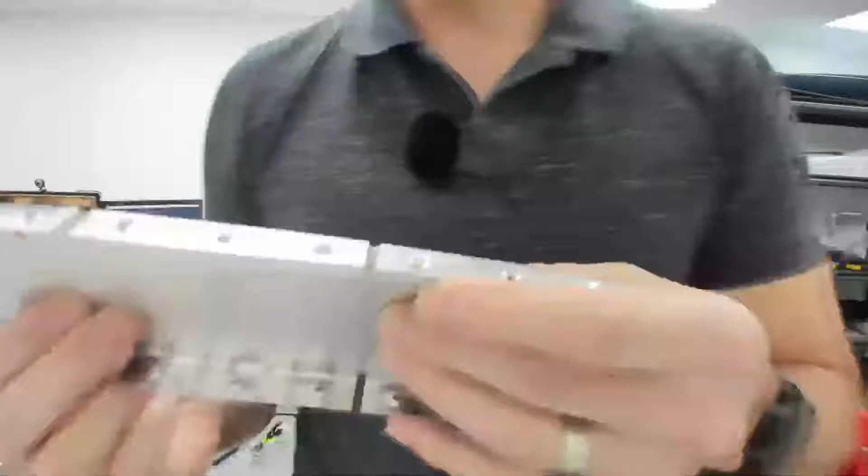Then what we did was work out, looking at our drawings, which parts we need to dimple. If I come over here, you can see we dimpled these on the last episode - there's a dent in the top of the rib there. That means the rivet head will sit on top of that and be flush on the skin, so you've got less parasite drag.

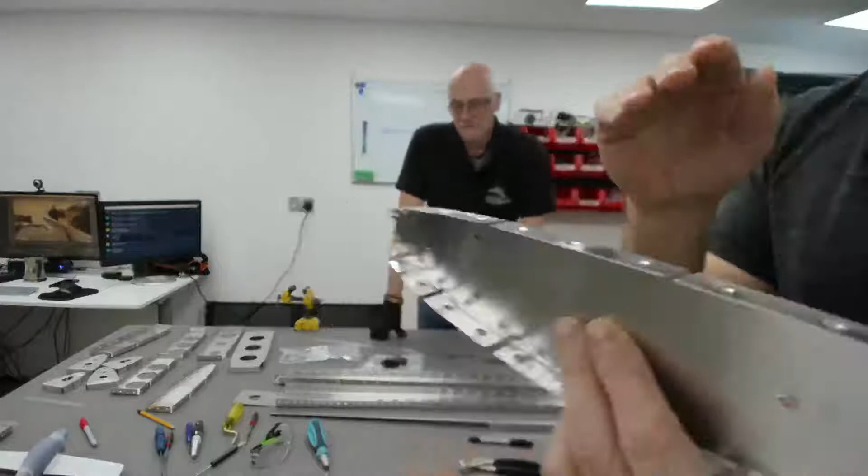Parasite drag is the drag that little bumps and things like your wing mirrors on your car produce - lots of parasite drag when driving along the motorway, lots of air getting disturbed. Any drag on an aircraft is bad because it means you need more power to overcome it, since drag pulls you back and power makes you go forward, which means you use more fuel. So getting all those rivets flush in the wings and tail of the TSI means it goes a bit quicker than the Sling 4, its predecessor, and also uses less fuel, which is good because fuel is expensive if you can get any.

I don't know about you, but the petrol queues are no longer out there anymore. No, I filled up before I came here tonight - the garages are full of petrol. The only downside is they've put the price up because obviously lots of people wanted it. 151.9 for diesel - yeah, that's not good at all. Oh dear, not good at all.

So where we're at is we've got it dimpled, and what happens is these holes need to receive - if I remember rightly, it's a 3.2 mil.

A 3.2 mil rivet goes through these holes. Because you're going to dimple it, once you put the dimple in, the hole gets a bit bigger. So what they do is undersize the holes, dimple it, and then run a drill through each and every one of these holes. There's 120 of them we've dimpled on this section, and you drill each out to the size required for a 3.2 mil rivet.

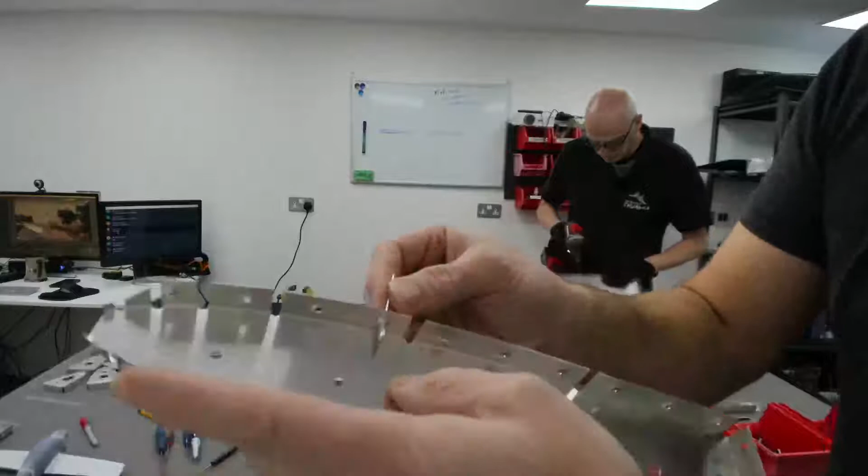We've got one there. And then we will take it and put it in there. If I come down to the camera, you'll see that this sits nicely in the dimple. You can see the mandrel, which is this long flat bit here - that'll obviously get pulled out when we squeeze the rivet, and then it'll get pushed out on the other side. So that's going to sit lovely and flush and neat in the hole for all of these.

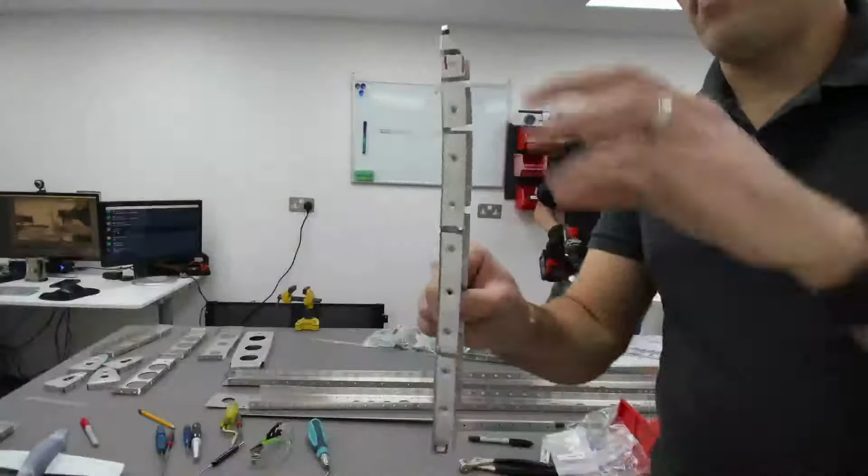So we can check through there, and that's going to look great. You can see this bit is a little bit bent, but it's aluminium, so it'll bend back, and we'll make it nice and straight when we've finished priming it and cleaning it. So that one's been done, so we'll put that there.

And we'll hang on to our special one rivet, because we want to use that. That's better, a bit quicker now. Was it on slow? Oh, it's on speed 1, so it's now on speed 2.

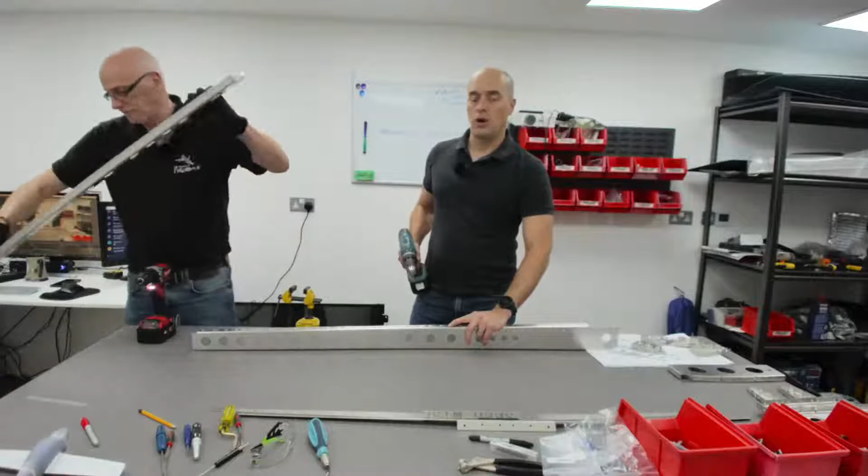And the good thing is that it's super cheap to operate an aircraft, much cheaper than hiring an aircraft. Obviously you've got the initial outlay, but the good thing is that once your aircraft is built, it's worth more than what the original kit costs, as long as you build it well. You're more than doubling your money once the aircraft is built, so it's an investment as well. That's how I sold it to management. She was quite happy with that.

I know she's not watching the stream because when I popped my head in earlier, she had some dodgy program on the TV, some period drama thing she's watching. What, like Downton Abbey or something? No, she just finished that the other night, so she's on to something new now.

There we go. Did both sides, yeah? Yep. Cool, so there we go, simple as that, that wasn't hard was it. We've got both of those done, so what is the next step? We've got them dimpled, we've got them drilled out.

First, next step's a cup of tea. Cup of tea, yeah, that's a good idea. And we're going to make some more noise now - we're going to hoover, because you want to keep your build surface clean.

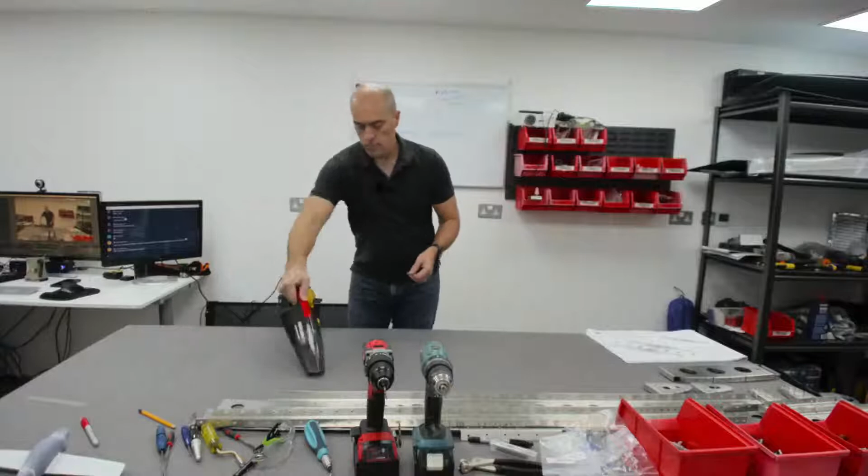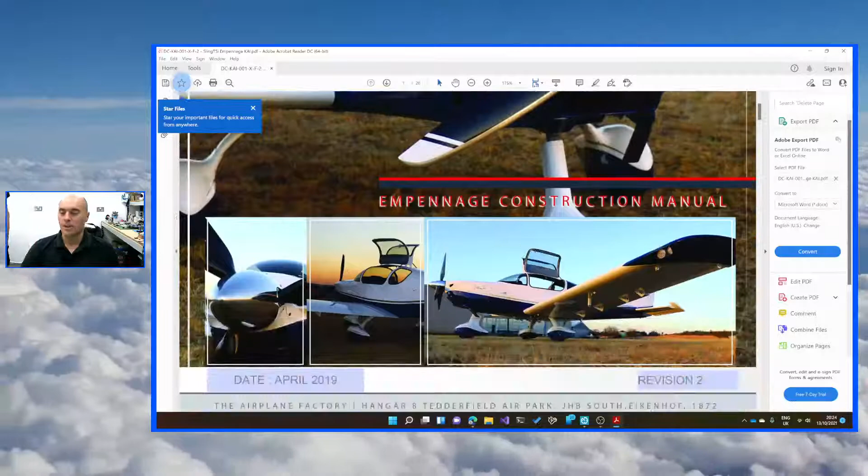Airwolf, says Lotus Dan. Yeah, now I've got the music stuck in my head. Thanks there, Dan. And how comes all those missiles and bullets and nobody's ever hit? It's still good though, isn't it. It pumps the blood, doesn't it, as soon as you hear the theme tune.

And I'm now thinking that everyone else listening is listening. Pete, I don't know what you're doing wrong mate, getting timed out all the time, but obviously you've been a naughty boy. Yeah, so here's the drawing, these are the CAD drawings that we had before, so you should be able to see those and a little picture of me either side.

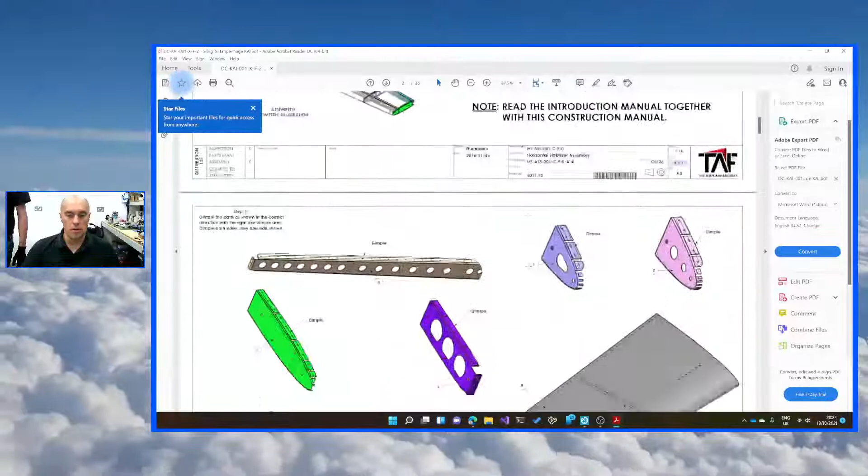So what we've done is we dimpled all these parts, and we drilled them out as well. So we've done that, and we're not going to do the skin. The reason we're not going to do the skin is because the skin's up in a safe place up there.

They can't see and... they can see me, can they? Yeah, look, I thought they were looking at... it's that little camera, okay, there, look, see, fine, it's that one up there. See, there you go.

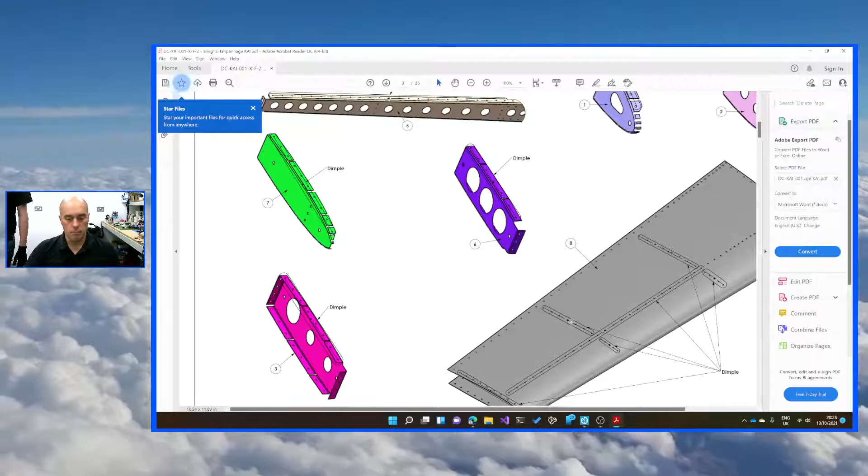And these parts here, what have I done there? No. These dimples here are on the skin, and we'll do that when we get the skin later.

What we're going to do is build the frame of the horizontal stabiliser. Then we'll call our inspector, Mark, and get him to come over and inspect the frame and make sure he's happy with the work and the quality of work we're doing, because he's not seen the build skills yet. So he signs off and gives us a little stamp in a build manual, which is up there on the shelf. And then what we'll do is we'll wrap the skin.

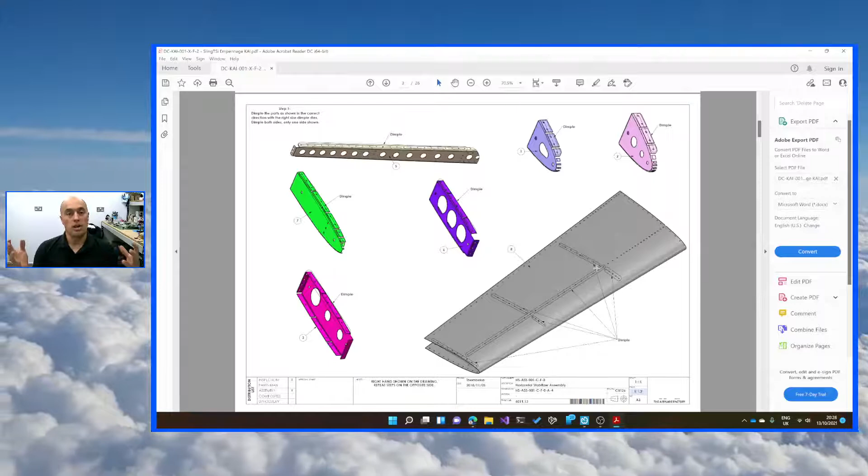The idea is that if you wrap the skin first, he can't see what you've built because you can't see inside metal. So you let them see the frame and then wrap it with skin afterwards. We've done that. We'll do the dimpling later, we can worry about that later. Then this is talking about the fitting together.

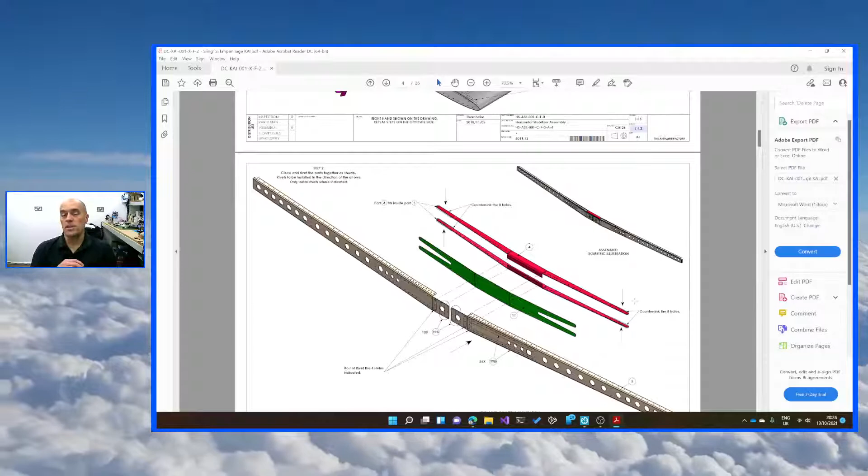What does it cost for the inspection visits? They're volunteers working for the Light Aircraft Association, so they volunteer their time. Some inspectors have a set fee, some do it for tea and biscuits, some for tea and biscuits and petrol money. So each is different - whoever your inspector is, you need to have that conversation up front and make sure you're happy with the costs they're going to charge you.

Even the ones that charge the most - and it is very good - tend to charge like £30-40 for an inspection, the most I've heard of. You probably need about 20 or 30 inspections throughout the build, depending on how comfortable they are with your skills and how comfortable you are with your own build. If you're a bit nervous you want more help at the beginning, more of them coming to inspect. If you feel gung-ho and off you go, your inspector might say, before you get to that bit, I want to see it again. Once you get that repertoire between the two of you, they'll hopefully give you a bit of free rein to hopefully not hang yourself.

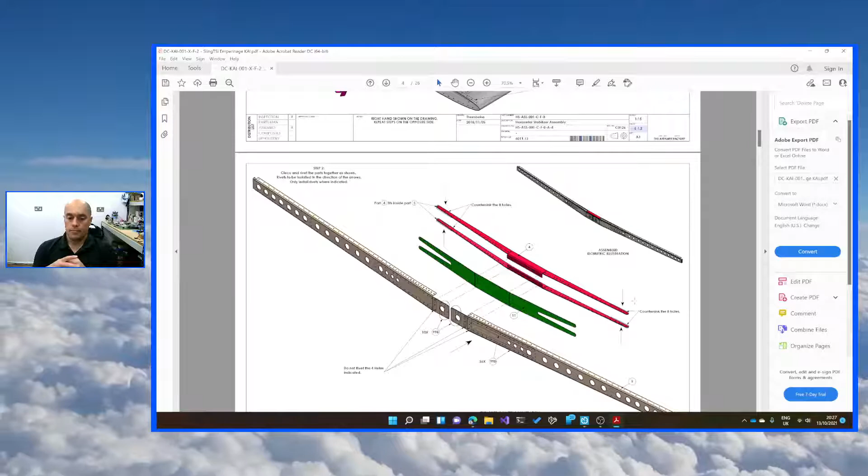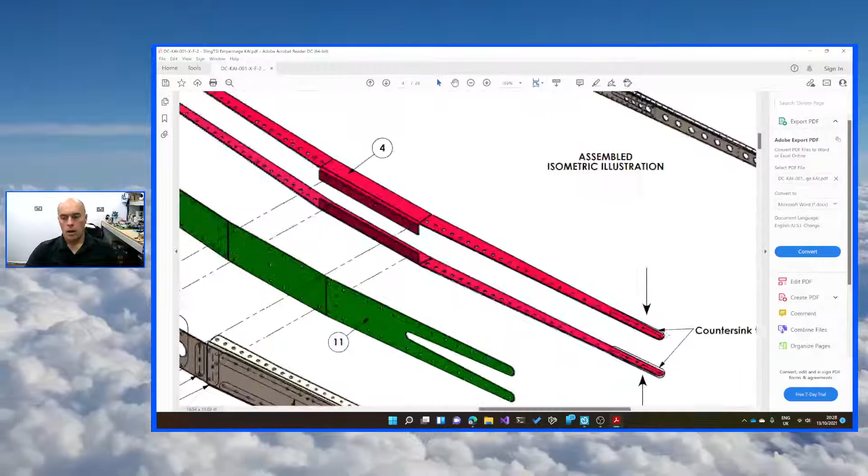It's a very important part of the process, and their expertise is invaluable because once it's wrapped in the skins, you're not going to be able to readily see fracture points or stress points. They're going to be looking at how the riveting is being done, how the deburring is being done, whether the bits of aluminium actually fit together sensibly, and whether they've got any swarf caught between them. Over the lifetime of the airframe it's going to flex for various reasons, and if you have some burring in there, or you've caught part of a rivet, that will grind in and create a fracture point which will fail at some point.

So this process is very important. While we're newbies at really doing this, they're there to say, right, yeah, this is good, this will get through - it will get primed, and then it can be put in with the skin. Then it gets inspected again after it's been primed.

So, Dan's asking about the UK reg. If you Google Golf Oscar Tango Sierra India, that's Tim's aircraft - he's the UK agent for Sling Aircraft. His one is built and flying, doing its test schedule at the moment, nearly finished. Last I spoke to Tim was about a week ago, we were texting while I was ill, and he hopefully should have it signed off in the next few weeks to a month. With the COVID stuff, the LAA engineers are a bit behind on signing off aircraft.

Pete's saying, search for Twitch how to manage harassment in chat, then go to set a non-moderator chat delay under chat. You'll have to send that to me on Twitter - I don't think it's a good time to be doing it now, we'll do that next time, because I don't want to be showing off. I think you'd end up seeing all my Twitchy stuff, which probably isn't a good idea to stream. But if you think otherwise, let me know and we could do it now as a learning thing.

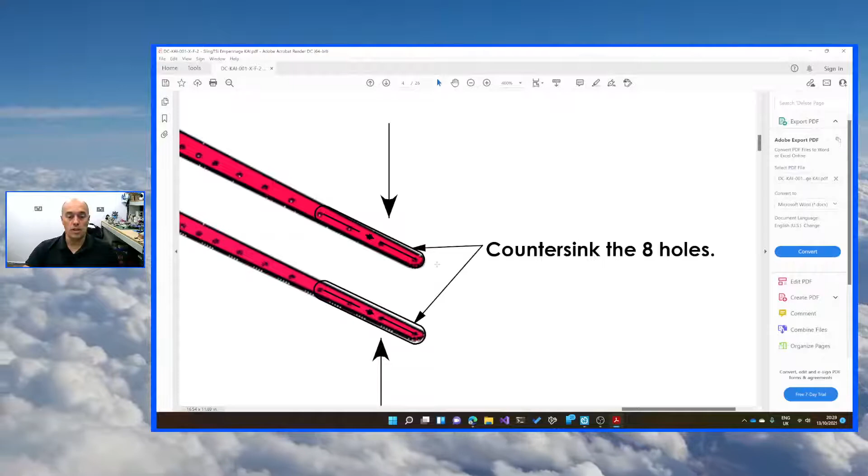So next, we need to countersink these 8 holes, and the reason is because they go inside this rib here, or inside the spar here, and they sit where some of these holes we've just drilled out, as you spotted earlier.

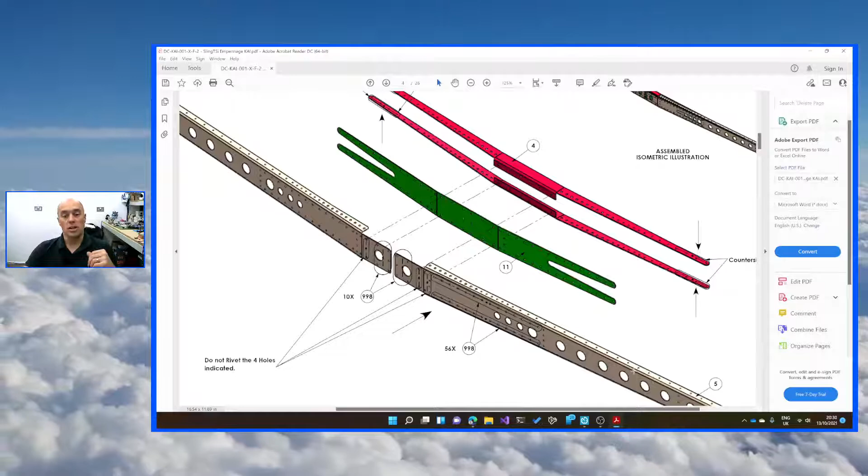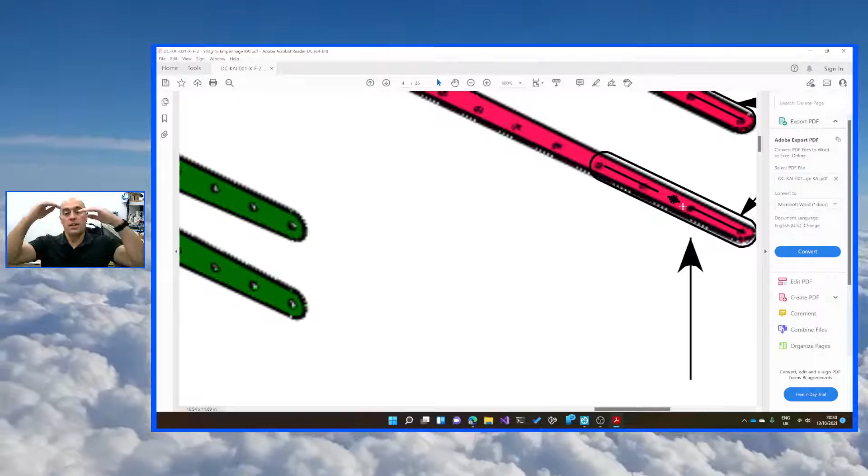We need to countersink those holes. Now, when they prep those holes, they drill them the same size as the holes drilled here, because they're match drilled, so they're undersized. Remember these holes down here, we countersunk, and then we drilled them out to 3.3. So when they started off, they were like 2.8 or something. So with these holes here, we need to drill them out to 3.3 so the rivet pops through, and then we need to countersink the tops of them so that the countersink of that spar sits inside, because this is quite a thick material.

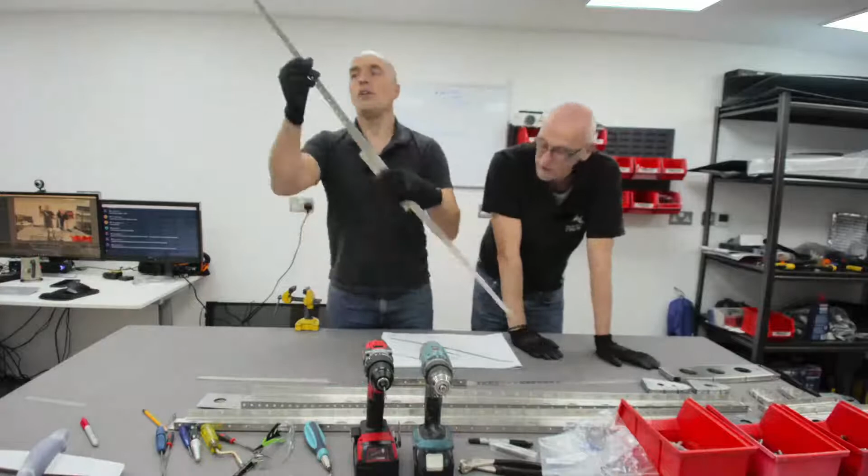First thing I want to do is make sure we're going to drill the right ones, and they should be good because we marked them before. Obviously that hole is bigger than that hole, and they're the 4 that it says. The reason we're doing it is because when it fits inside this part and goes inside like that, you can see these 4 holes line up with those 4 dimple parts, and obviously it's not going to fit, and you'll see the fact that it doesn't fit. So we need to countersink those parts, but first we need to drill them out to 3.3. We'll use our trusty vise to hold the part, because you don't really want to drill through a thick part by hand that way round.

That's about square. I don't want to do it by hand while holding it, because it's just going to flex and go everywhere. So we'll just clamp it in the vise.

Like that. So on the Christmas list, have we got a pillar drill? You know what, it is on my wish list, Chris. You know, a good friend would buy one, wouldn't they? I'm just pointing out, or if some rich person comes and sponsors the channel, you never know, we could buy it anyway.

So we've got that, we've got our 3.3mm drill, and we're literally just going to line it up and go through there. And what I'm going to do is move it along a bit so it doesn't bend too much.

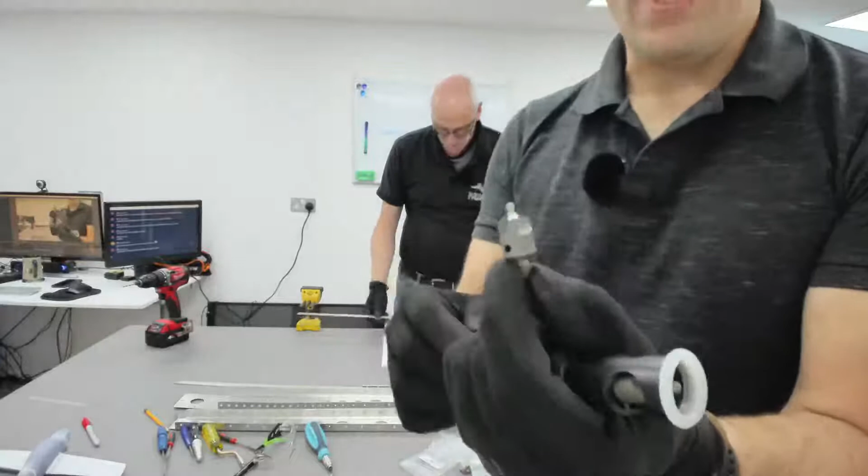So what you do is you have one of these. Now this is a cool little tool - it's a microstop countersink drill. In there is the countersink, and it looks like one of these. These come from an American company called Brown Aviation Tools. You can see it's countersink, and it's got a peg there, it's sized correctly. So this is the number 21, and the one we need is the number 30. It's American, so they have an odd numbering system, but it's the right size we need.

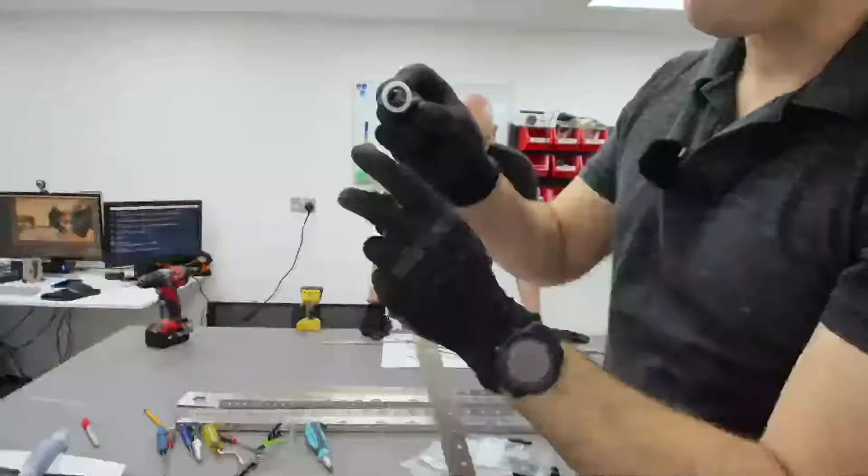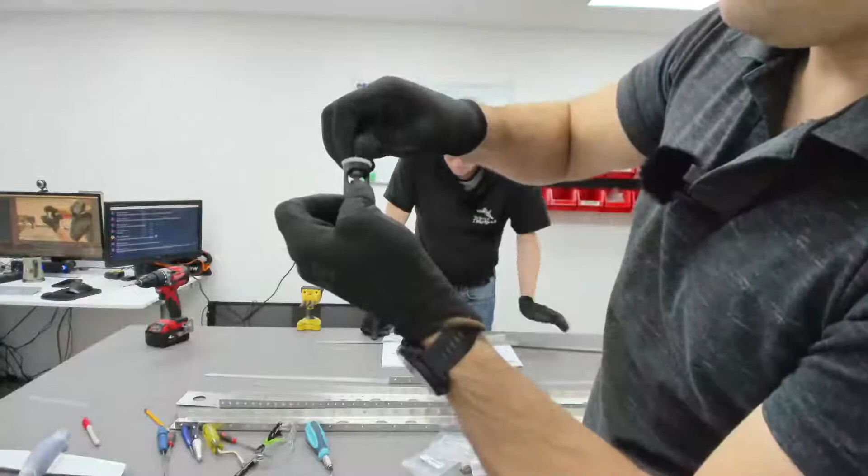Yep, it's that size, so we need to countersink this part here. Actually, I've got the wrong one in there - it's the number 30, the smaller of the two, Cliff, not the larger of the two, smaller of the two. So it literally just unscrews like this, and we'll put that down, and we'll screw in the size we need.

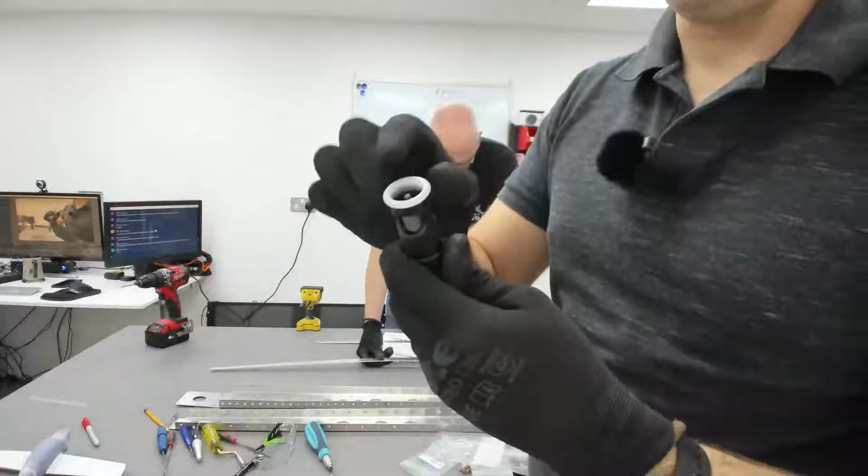So I bought these ones with a nylon base, and that's so it stops the scratching of any of the components when it's on there. But you can see as you push your drill against the material, it's going to stop the head coming out. I'm not sure if you can see it just like that, but it stops it coming out.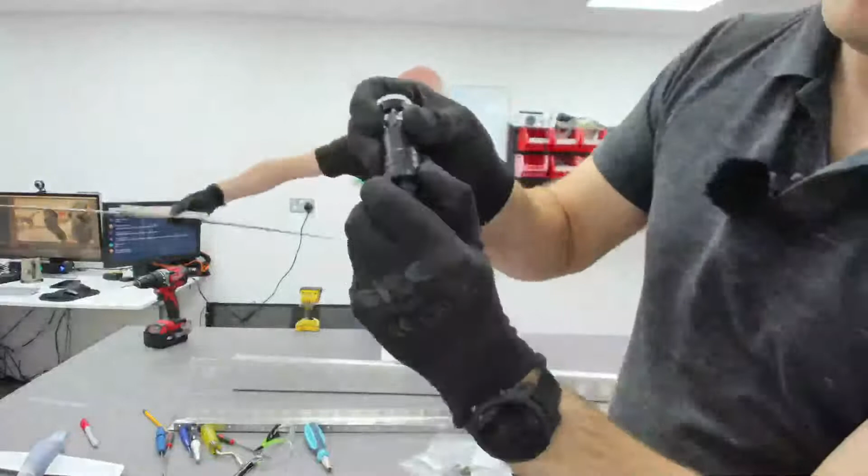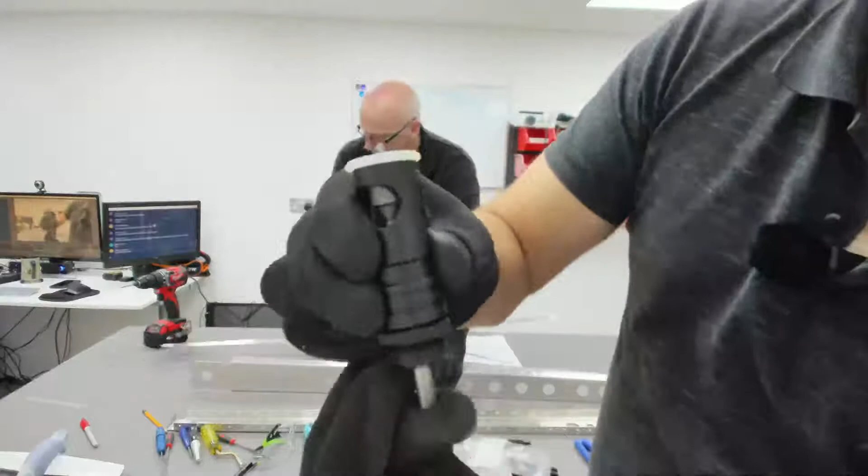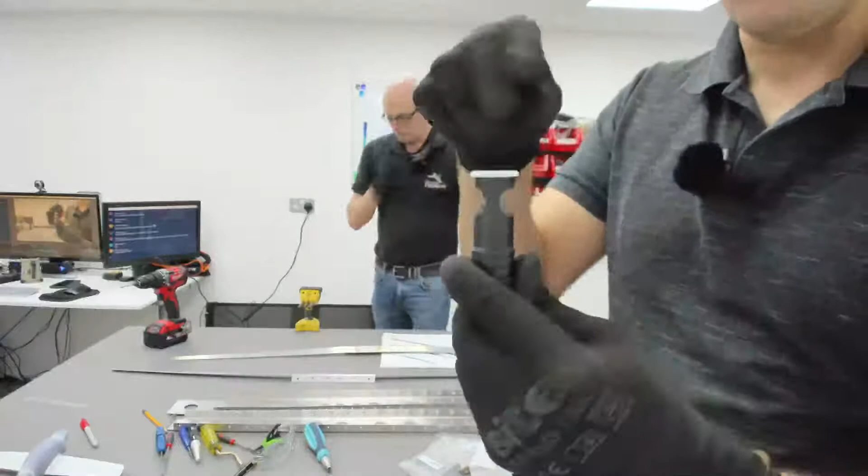So what you need to do is undo the locking nut, push it up and separate it, and then you can twist it a few stops, and you can feel the teeth in there, and that's why it's called a micro stop. Then you can push it up and see that it's stuck out a little bit further. So you start it off with it sticking out just a little bit, and you check it with a rivet. Then you work out the fact that actually I need it a bit deeper, and you do a couple of clicks more because it's a micro stop, and you get the depth right. Then the idea is you don't take it out and you don't touch it.

So I've got two of these, one for this one and one for the other one - the other one's in my kit over there. These microstop drill bits, again, you can get them from Brown Aviation Tools, or from a couple of UK suppliers like LAS, who actually just buy them from Brown Aviation Tools and ship them over.

What's this going on here? It's going to be like Gibbs' boat in NCIS - we're going to be asking how you're getting this out of your workshop. We thought about that, we're going to disassemble it and take it out. No, the doors to the workshop over there are 2 meters wide and 2 meters tall, it's actually a square, and they're big French doors. And the widest part is the fuselage, which is just less than 2 meters.

So this workspace and workshop was designed to build this aircraft. When I was designing and building it, when we were digging the footings, myself and my brother-in-law, we accidentally dug them about half a metre too far that way, really. We did, because management agreed we could build it so big, and we built it ever so slightly bigger. Then we poured the concrete, and it was a bit late then. So she did complain, but there's not much she could do about it - we poured the concrete.

Are the gloves good at preventing aluminium splinters? They are. These are just the cheapest ones we could get from Screwfix, and you can see they're kind of worn a little bit already. They're the cheapest ones, and the reason is because you want to be able to feel through them - you want a bit of dexterity, you want to be able to feel what you're touching.

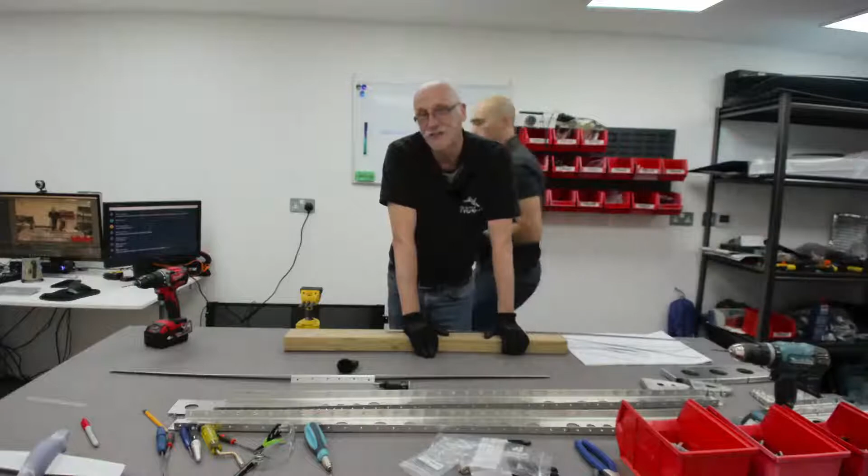So, right, how are we doing? We got a proper wood drill. It's a bit old and manky, but it'll do the job.

What were you talking about? Weekends and getting drunk, my allergy. I wish I was allergic to alcohol. Maybe I am - everyone's allergic to alcohol in large amounts. Yeah, I certainly am, a bit partial to a nice whiskey though.

Okay, where's the - oh no, I'll just do that and clean it up later. I'm sure our very nice people here don't want to watch me hoovering all night long. I'll put that down there to make sure I don't accidentally use it on the wrong thing. So there we go, done that, and I can put that drill bit - we don't want that drill bit in there, do we? We want that drill bit.

Totally fell asleep putting the youngest to bed. Okay, hey, Carl's here. Hey Carl. How did I know it was you, Carl? Just from that. You should have just watched the stream, you could have fallen asleep doing that instead. You missed the dad joke. I'll tell it again, shall I? No, fair enough, just watch the stream.

So, like I said, we've got a micro stop drill bit. This fits in the hole like that, and then what we're going to do is drill down and countersink the part.

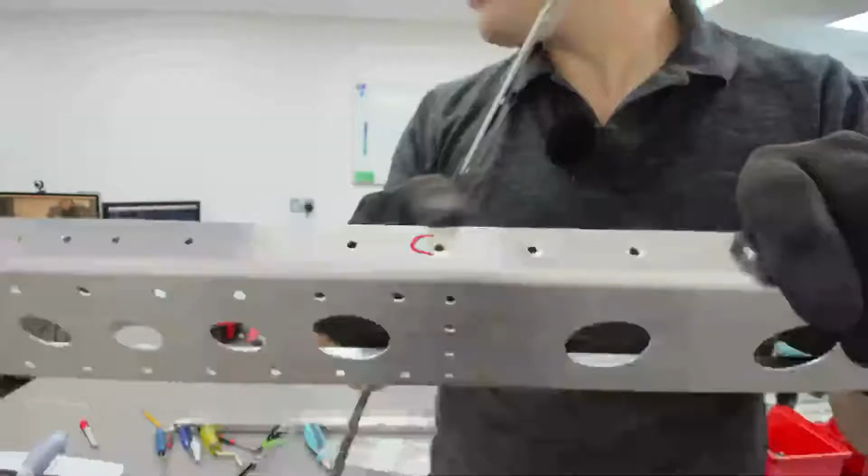So if we come over here, here we had our dimples in the spar here. We've countersunk these four holes, and then, if Chris can come and help line this up, when this lines up with the four holes at the end and it drops in, when it gets riveted, it will hold it flat, just like so. So obviously the countersinks come through, sit inside the rivets, and it holds it just like that.

Now we've got that set, what we want to do is, if we can, never ever change this setting. It's on here, so make sure it's nice and tight.

And then what I'm going to do is, I've got a paint pen here somewhere. Put a mark on it, see if it slips. I did have a paint pen. Did you? There's a Sharpie over here. No, it wasn't a Sharpie, it was a proper paint pen. Yeah, I did have a bunch of them. Oh, I know where they are, actually. Don't tell me they're down the pub. No, they're not down the pub, they're not in this building. They're in the office, and I know why they're in the office, because I was using them the other week. Yeah, jinx. Yeah, everything's down the bloody pub.

What sort of testing can you do on a plane once it's assembled, before you fly it?

Well, we've got some test dummies lined up. No, the testing, Pete, is we put you in it and say good luck.

No, what you do is once the aircraft's built, you hand it across to a test pilot, who's one of the LAA test pilots, basically an experienced pilot on light aircraft. I've got tens of thousands of hours flying big aircraft, but only a few hundred flying little light aircraft, so I'll hand it across to a test pilot. There's a test pilot who used to be a test pilot in real life for the RAF and the military, who's in our little group of sling builders in the UK, a fantastic guy called Al. So I'll hand it across to Al and say, Al, can you take it for the first flight, which is basically getting airborne, flying around the circuit, landing again, then taking off and doing it again. Once that first 30 minutes is put on the airframe, and there's nothing majorly bad or broken or odd with the aircraft and it handles correctly, then I'll jump in with him. We'll go off and do another 40 minutes of flying around to make sure it's okay. Then Al can hop out, and the rest of the test schedule, give or take about 25 hours of test flying, can be done by myself, as I'll be rated on the aircraft by then, and Chris can come along and write all the numbers down.

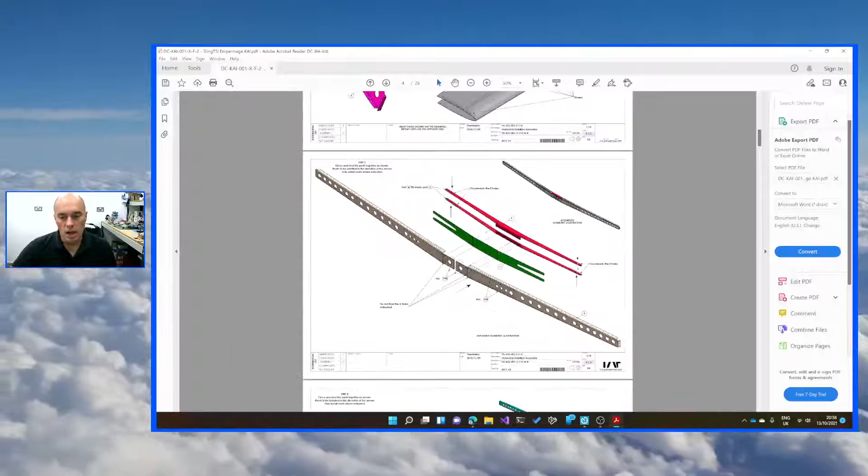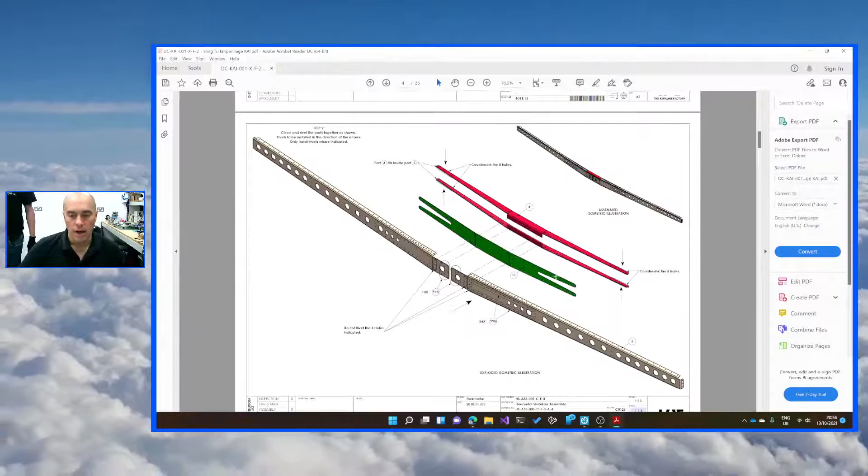So yeah, where we're up to - let's go back to the drawings. Yes, quite right, inception, it is about planes. A bit of inception. Back to the drawings - so now we've deburred this. Now the important bit is, like I said before in previous streams, you can't just go step one, step two and think, yep, I've got that, that's okay, because things like this will get missed. Countersink 8 holes, do not rivet these 4 holes - we can worry about that later. So we countersink those 8 holes, and they all fit together.

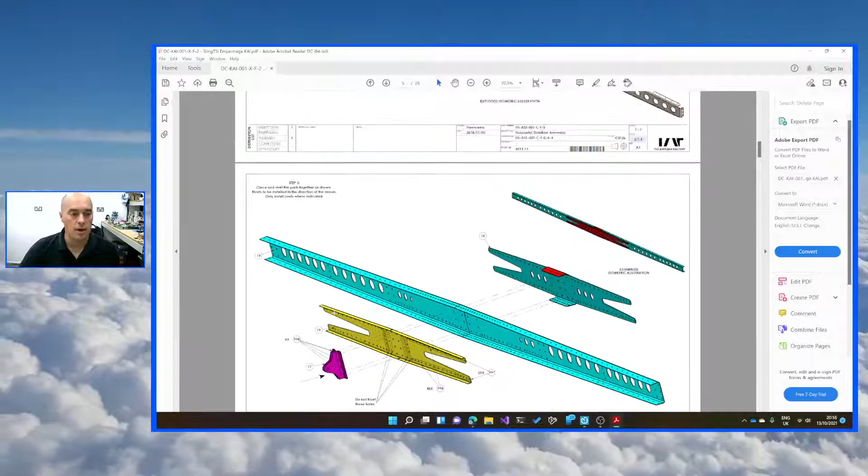We're okay there. Now we're looking at these - don't rivet these holes, and we're looking at these. We need to find this part here, number 17. So Chris, if I read out the part number for number 17, which is all the way up here, and number 17 is that number there. So it's hinge bracket 1, it's HS for horizontal stabiliser, HBK for hinge bracket, 001 because it's number 1, and there should be 2 of them, Chris. If we go back across, there should be on this shelf down here, because all the brackets are down there. Right, so what we're looking for - HS hinge bracket 2, so it's not that one. We're looking - I've got 001 XA hinge bracket 1, so it's hinge bracket 1. That's the one. Yep, but that looks nothing like the drawing.

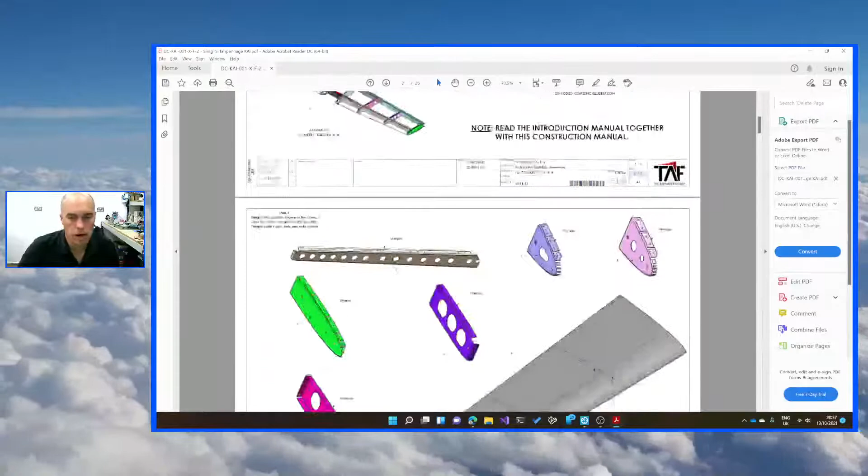Yeah, no, that's because this is kind of curved. What page are you on? We'll go back here, and we wanted hinge bracket 1, which is there. Is that because there's 2 of them? Well, you never know. That looks nothing like that - so maybe there's 2 of them. Is there 2 of them back to back? That's what I'm wondering. There's 15 - is that there as well? There's 16.

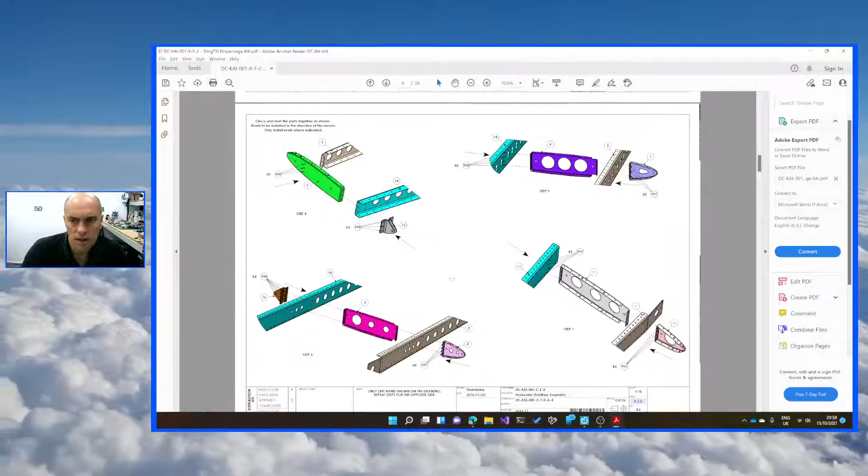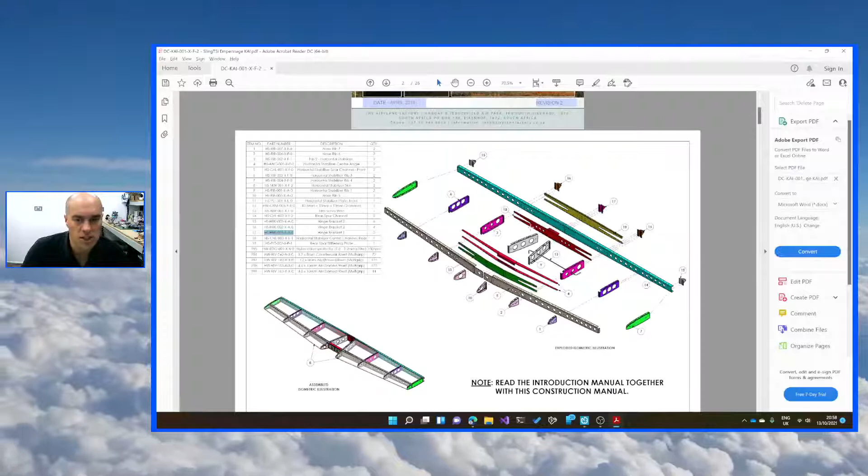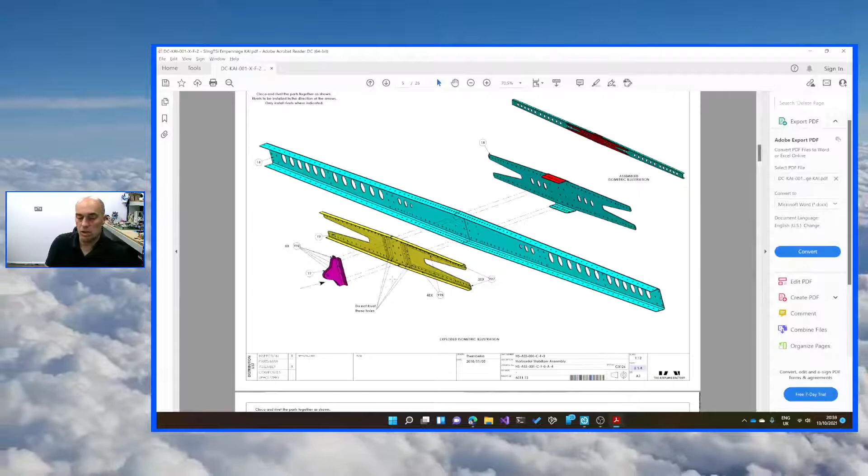So we need to find all the hinge brackets, HBs, yeah, all the hinge brackets 001 - there should be 2 of those. There should be 4 of the 002s, and there should be 4 of the 003s. Well, that'll be this little lot then. Right, okay, so hold on a minute.

Of course, the barcodes have been twisted and bent, but we just need to read the number underneath it. So that is bracket 2. That is bracket 3. That is bracket 3, bracket 3. Bracket 3. That is bracket 2. And that's one, bracket 1. Yep, so we've got 1, 2, 3.

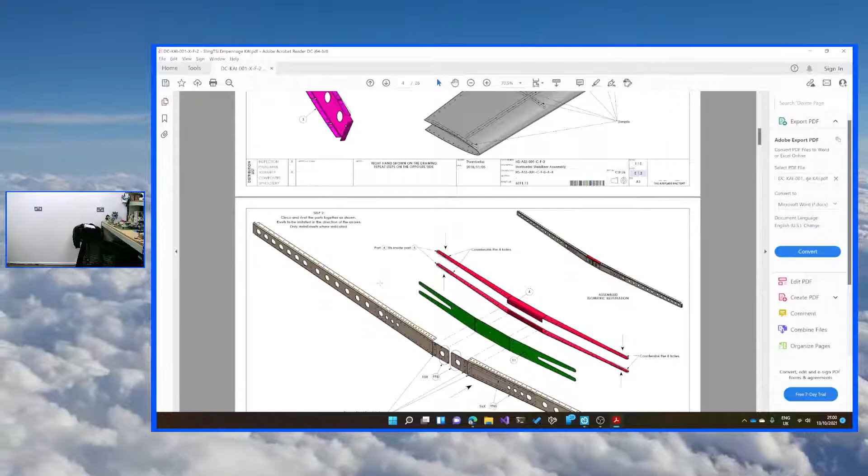So they must go back to back like that and get riveted in. So we've got the brackets, put those over there out of the way for the minute. And we've got all of our components here. So we can go back to the drawings and find those components.

Because that'll be around this side. I like Carl. Anyway, this is about planes. I think it's getting way more complicated than that. We should do a treasure hunt. Oh, treasure hunt! Yeah, treasure hunt, well, Anneka Rice. Stop the clock, stop the clock. Yeah, I think that's a cool idea.

Anyway, it's about planes. What happens if you go wrong on this? Well, if you go wrong, you have to get your wallet out and buy more parts from Sling, The Airplane Factory down in South Africa. So not only will it cost you more money, but you have to wait many weeks, if not months, for the parts to arrive from South Africa, certainly with the shipping problems at the moment.

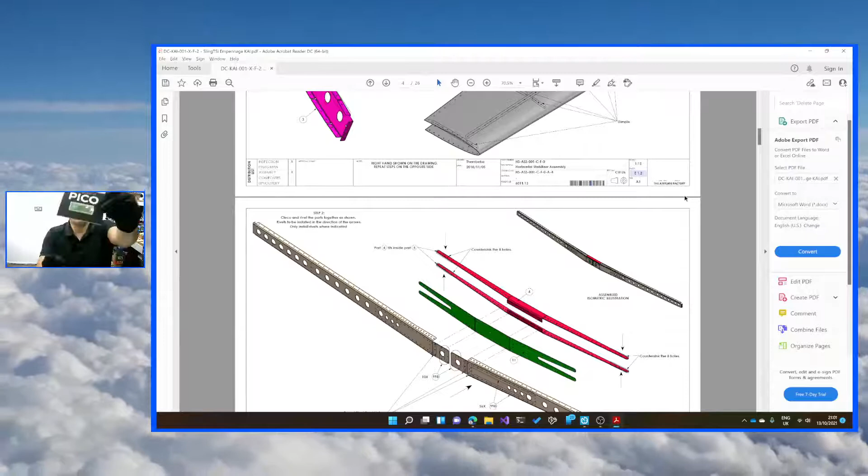There's a Pico, we've got one there. I don't want to take it out of the packet because I quite like the fact that this is the one I got with my Hackspace magazine. So I'm not taking that one out of the packet, but I've got plenty of others over here I can use. Are we getting back to the plane build?

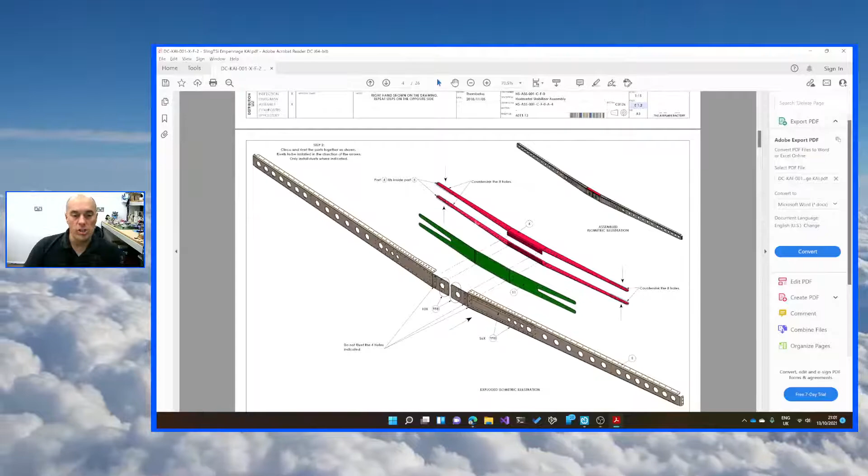Going wrong is bad. Yeah, going wrong is very bad, very expensive, and time consuming. So look at the drawings again. We've got all the parts there. We've got all the parts here. And we've got all these parts here, which is showing, and we need to put it together.

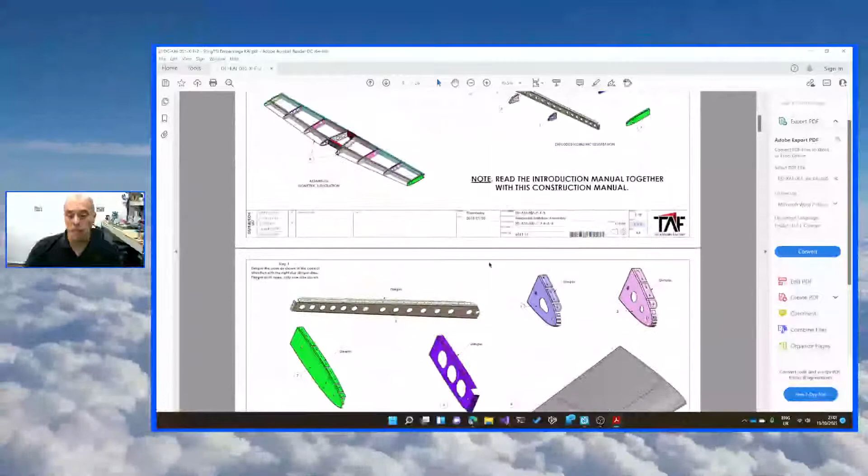So the next part of the build is literally to prep all these parts for spraying. We've got all the parts deburred now, we've got all the parts dimpled, we've got the holes correctly sized. So the next part is to prep them for spraying. What we'll do first though is prep those brackets, make sure they've not got any burrs on them, and number them correctly, and then we'll show you how we prep for spraying.

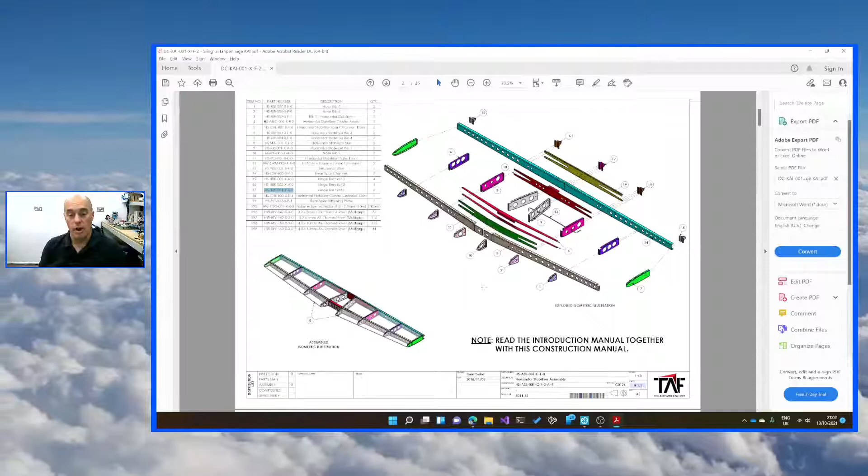So if we go back to the build cam, let's show Chris. So we've got our brackets, these ones here, turn it away because it's my check. Have you checked all the parts are there? We did, and one of the things we did there, Pete, is you can see they've got a barcode on them.

And what you have to do when the kit arrives, you get the packing list in the box, and you have to manually go through and find the part and find it on the packing list, and you tick it off. And you find the next part, you find it on the packing list, and you tick it off. And it's mind-numbingly boring. It took us a couple of hours just to do the empennage kit, which is the smallest kit that gets delivered. The wings kit and fuselage kit takes forever to do.

So what I'm doing as part of this build is, once I've got bits sorted, I'm photographing each and every component. The big components, not obviously the rivets and stuff, but each and every component I'm photographing using Azure Percept, which is up on the shelf up there. They're going to go up into the cloud and get stored.

And then what I'm also doing is building a mobile app, using ZXing, which is a NuGet package you can pull into a mobile app like Xamarin, and it will read the barcode and give you the code, which is actually the HSHBK001 code, and then you can use a bit of C# code and look it up in the Cosmos DB is what I'm thinking, and from that pull down an image that we already took with the Azure Percept, and then show that to the user.

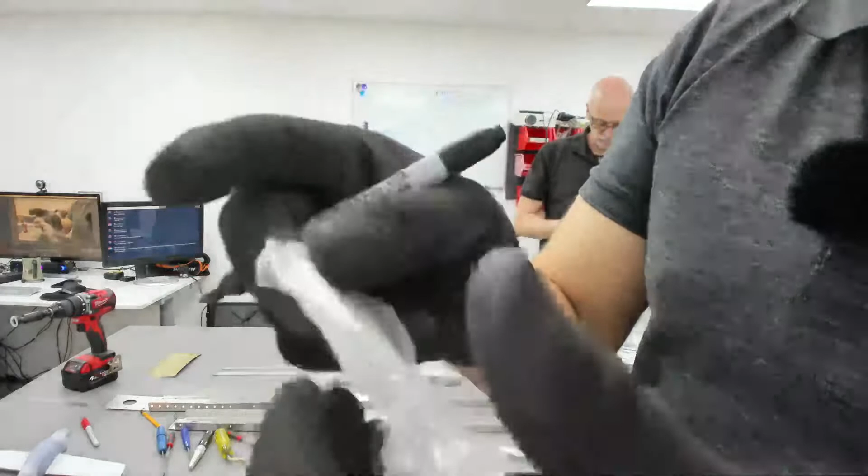See, this one wasn't even put in properly. I'm going to show you this one because this is an example of how bad the printing is on there - not sure if you can see it. You can see it's not brilliant to read. I know I'm an old git, but you can't really make out what's written there. So the idea is reading the barcode - when we part checked this, it was obviously quite difficult to check we had the right parts.

Hinge bracket, 3 clevis is what that says - horizontal stabiliser bracket, yeah. So reading the barcode, what you had to do when we part checked this was find one you could actually read and then hold them together - like, yeah, that must be the same. And they're in the same kind of bag, so you can narrow it down that far. But again, once they're on the shelf, you haven't a clue. It's only the fact that I put them together, because I knew they needed to be together, that we could get away with it.

So apparently I've done 10,000 steps, Chris. Really? Yay, apparently yeah. Well, where have you been today? I don't know, walking the woofs. Ah, walking the woofs, yeah, that will certainly put a few on.

So yeah, there's lots of tech that's going into this aircraft, lots of tech that's going to be used, because we all love tech, we all love to play with tech.